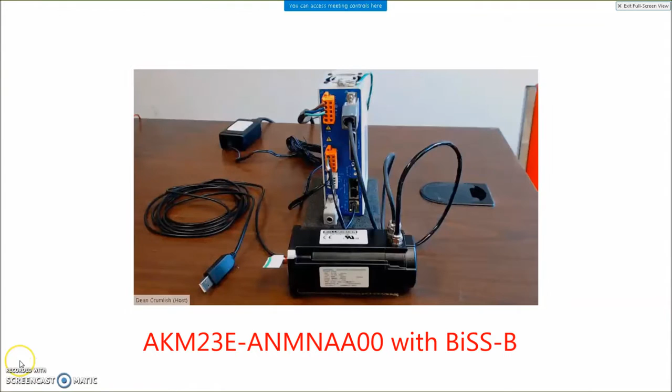So today we're going to look at the Kollmorgen motor with a BiSS-B feedback and a sine cosine. It's very interesting because most of the BiSS applications tend not to have sine cosine. But the sine cosine is good for getting a higher resolution by doing interpolation inside the drive.

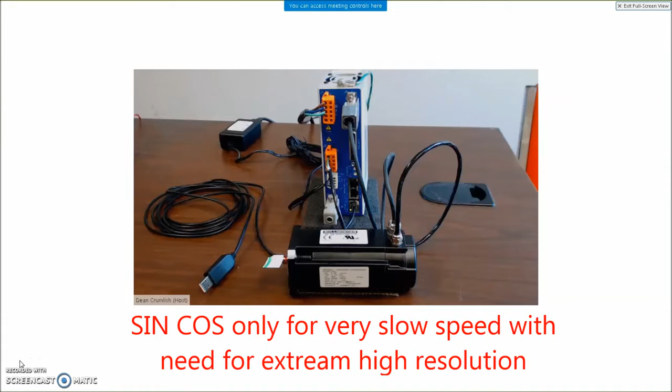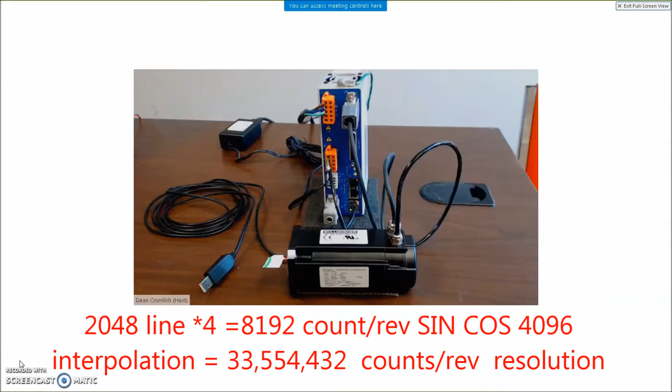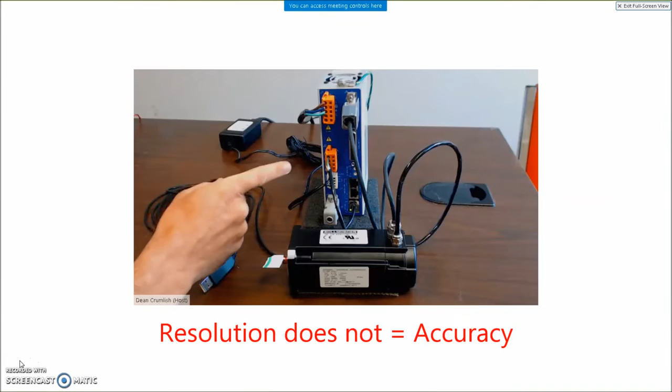I've got the STO bypass jumper installed to bypass the safety. I've got the 24 volts hooked up. There's no brake on this motor, but if there was, we could hook it up here. Got the motor power wired, U, V and W, and I have the AC power, 120 volts AC. This can take 120, 240, 208, whatever your AC is.

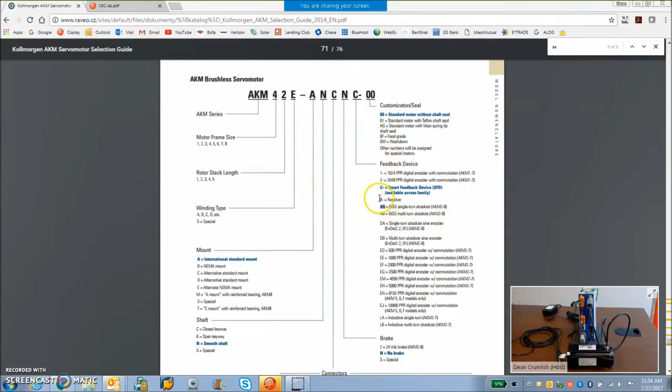So I've got the AKM selection guide here. It's a 2014 document. You can see the AKM, all the different frame sizes and options. This specification sheet contains all the inductance, resistance, torque constants, continuous currents, everything we need for the motor specification data. Plus it details the feedback devices that are options for this motor.

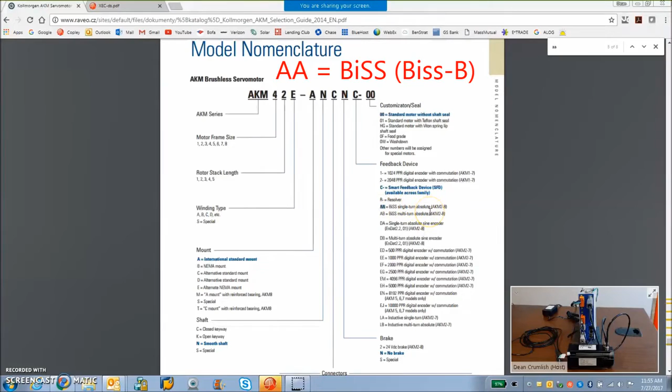And today we've got the AA, which says BiSS-C single turn or BiSS single turn. It's actually a BiSS-B, like a Hengstler device. And it does come with sine cosine. That's very familiar with like an EnDat 2.1 with sine cosine, but with the 2.1 you would need the sine cosine. With the 2.2 EnDat you would not need sine and cosine. And the same is true for the BiSS-B. You don't need the sine and cosine.

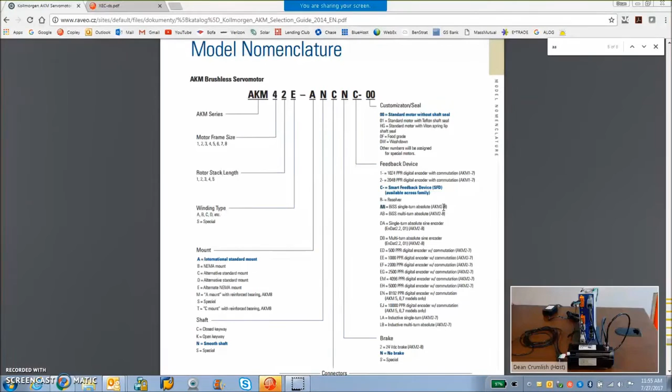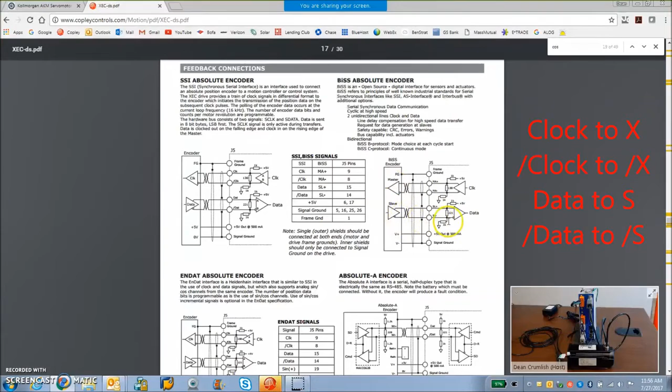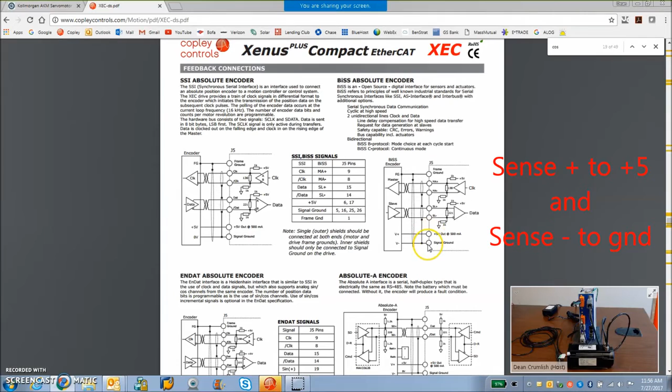So I'm looking at the Xenus compact data sheet here, and it's showing the BiSS absolute encoder and how to wire it to the feedback connector. We have clock coming out of the drive. That comes out on the X and X naught and clocks out the data over the S and S naught. I've got +5 and ground connected. The motor has a sense plus and a sense minus. I'll double those up on the +5 and ground so that I have less IR drop over the cable length.

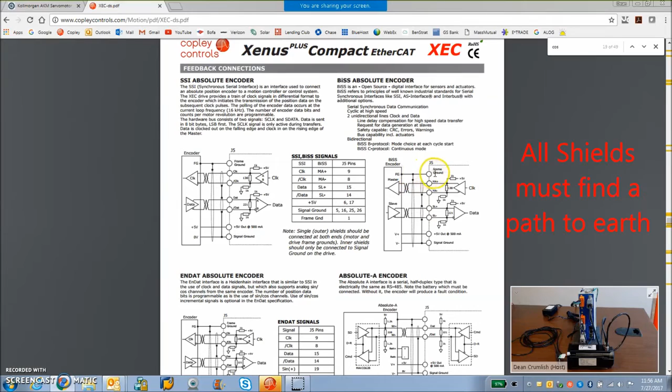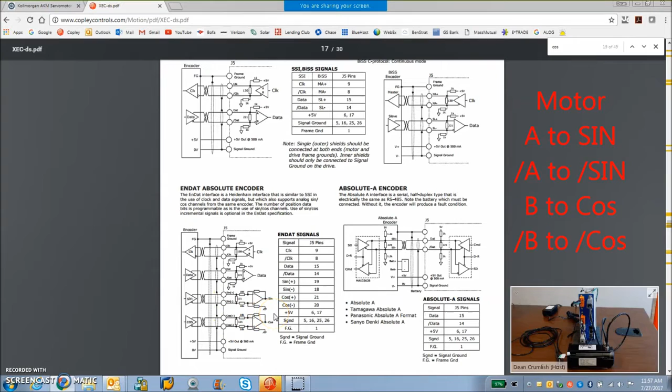And of course, make sure you hook up the shield to earth. The drive, the Copley drive, has pin 1 for the frame, so take the shield and connect that to pin 1. And for the sine cosine connection, we'll do the same thing we did for the EnDat. The shield hooked up, and we have sine plus, sine minus, cosine plus, and cosine minus connected to the drive with respect to the signal ground and the +5.

So I'm using CME2 version 7.1, the latest beta, downloaded and installed, and I've got the drive configured from the motor specification. But I did want to show something about the feedback resolution. You can see we're holding position. Normally we hold position plus or minus a count, but we've got some ridiculous interpolation here to get us the resolution. It's like 33 million counts per rev. And sometimes, what do you get when you get more counts per rev? You get more following error.

You also have more counts per rev for closing loops and stuff, so that's good. But just so you can see, when we're enabled, you get plus or minus maybe 100 counts, and then when we're disabled, there's still noise. I mean, this is an analog signal. It's susceptible to noise, and it's still going to have plus or minus about 100 counts of noise error based on the signal to noise ratio.

And this Xenus Compact has some of the best A to D converters. It's off chip. It's got a high ENOB. So this is just the effect of interpolation, but it's fine. We're getting crazy resolution, and that's working for us really good. We'll show you how to do that too.

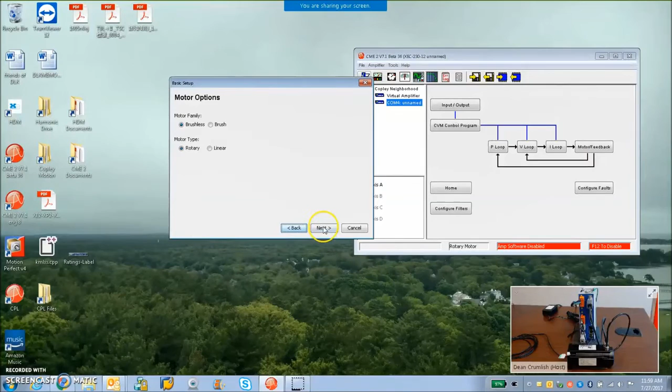So the first thing we look at on the basic setup is how to configure this sine cosine. We're going to say we have BiSS on the motor shaft, and we're going to say the load is the sine cosine. That's the analog feedback, and we'll use that to close the position loop. So technically speaking, the current and velocity loop are based on the motor absolute encoder. This is good for commutation, and it's also a reasonable 500,000 or more count for velocity loop tuning, which is perfect. And then the high resolution will come from interpolating the sine cosine.

We can also put it in the mode of operation we like, and we can emulate the encoder count output. That's from the load. That's the 33 million counts per rev, so we may want to divide that down if there's a controller that's looking at that too. But for the most part, just let the Copley close the position loop and read the position over the serial port or EtherCAT port or even the CAN port on a CAN drive.

So we'll take a quick look at the configuration of the Kollmorgen feedback device. It does say 24 bits in the catalog, but it's really only 19 bits with 5 alignment bits that aren't used for anything. We select BiSS-B and we come up with 524,288 counts per rev. It's a single turn. If it was multi-turn, it would be a 4096. Probably has the Hengstler with a mechanical device and no battery.

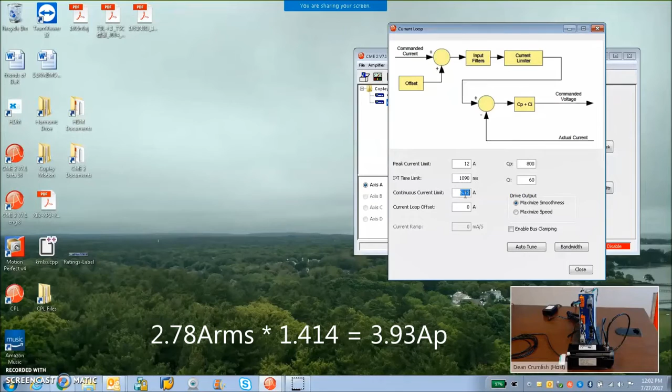The peak and continuous current are calculated. This is the peak of the amps, not the RMS. So, RMS times the square root of 2 gives you the continuous peak. So that's where this number came from. And the 12 just happens to be the 12 amp peak drive limit that I have here. So that's fine. On the V loop, you can see the velocity limit. So this number should always be 10% greater than the maximum speed I want to command.

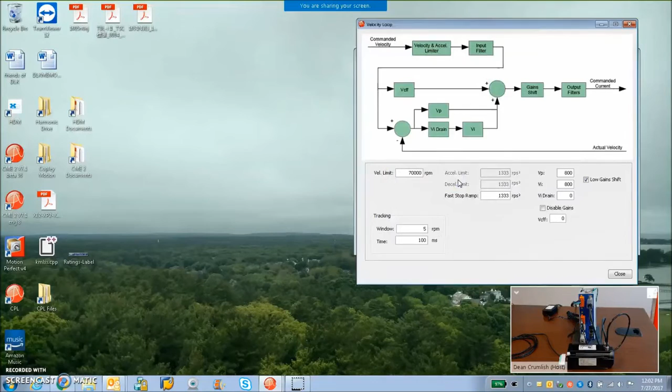There's some limiting going here. And the gain values are initially calculated, but I did some velocity loop tuning here. So we'll take a quick peek at the velocity loop tuning.

So first, the current loop auto setup checkbox, hit start. You can see the current loop step response. Even if I'm hitting it with a large step, I get a well-behaved current loop here, so that's fine. I've got 900 hertz current loop bandwidth.

So next I'm going to apply to the velocity loop, auto setup checkbox, so I can look at the current actual, but I'm going to chop the calculated acceleration down a little bit here. If I had an inertia or a load attached, I'd want to further reduce the acceleration because I don't want to hit a current limit while I'm tuning.

My speed for 400 RPM is slow, but my back and forth rate might be a little high, especially if you have a load attached. So we're just banging it back and forth at a nice, comfortable commanded velocity. This goes through the limiter and becomes a limited velocity. And you can see the step response. There's a little ripple in there due to the motor's cog or detent, but that's okay.

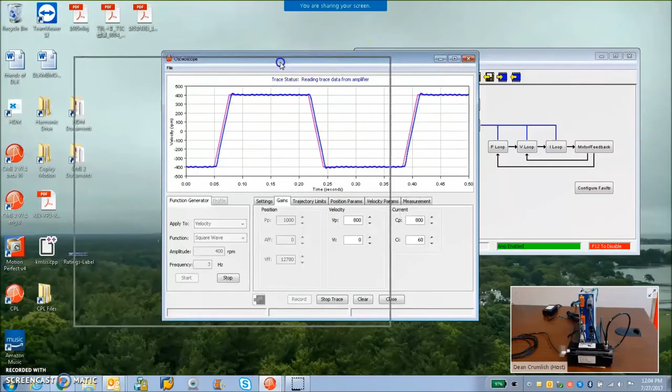But basically what I do is I set the integral to 0 and look at the steady state error, shoot for the P term first. If the P term is too high, you'll break into oscillations, especially if your velocity loop pole is a 2-pole. So I move the pole out by making it a single pole, so the roll off is a little less.

So you can see the oscillations. That was at about 180 hertz, somewhere near where the phase margin shifts as the pole is located there at 200 hertz. But with a higher gain, you get a stiffer velocity loop. I'm going to relax it a little bit so I can move my pole around in case I have a mechanical resonance in the system. It's always good to reduce it.

And then we can start off with a high integral term. Again, we'll look at the integral windup at the end of acceleration to see if we get much overshoot. And it's not much. That might be a little bit high, but we'll turn it down during the position loop tuning.

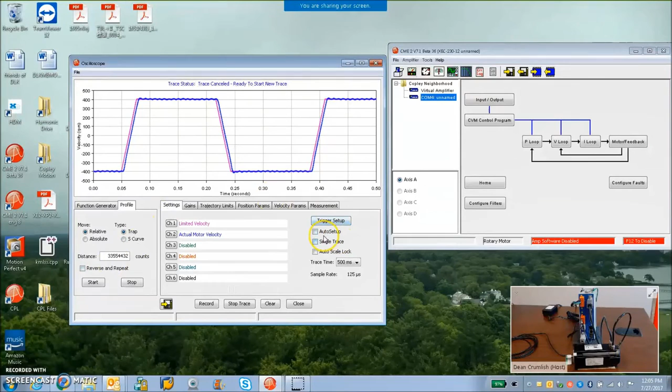So I'm going to put in a value for acceleration here based on my counts per rev. So I have a rather high number, 33554432 counts per rev. Auto setup checkbox again. 33554432. There's 1 rev. I can set the trajectory limits. Let's hit 1,000 RPM. We'll go at 100 RPM here.

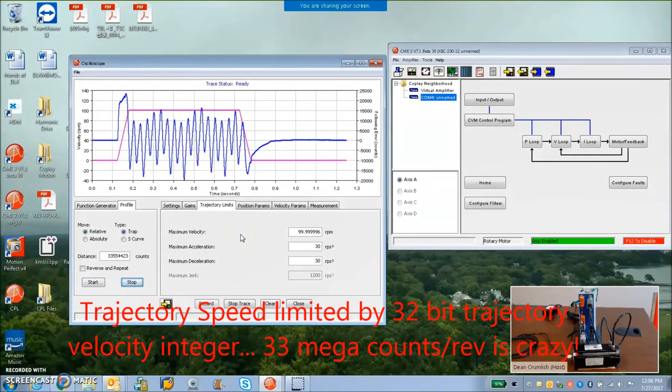So we can see that the tuning at the following error, the integral gives us a little amount to get to the steady state. I can increase the integral gain to get the steady state to settle in a little bit quicker. If I overdo the integral gain, then I could get integral windup.

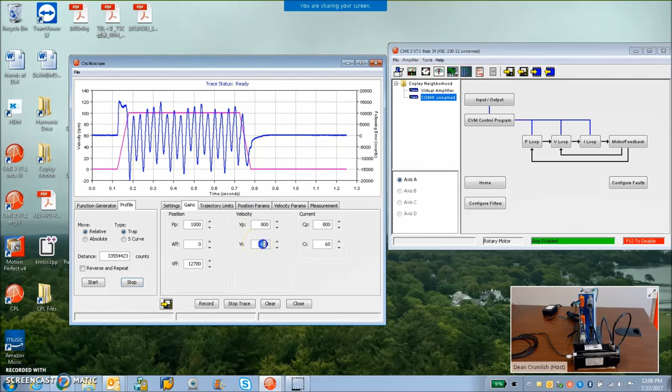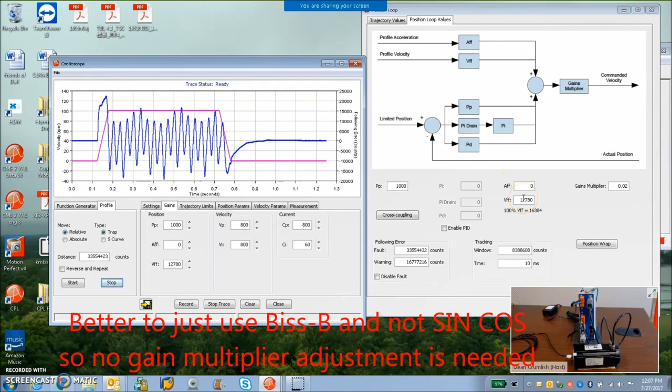So taking a look at the P loop, I can see the gain multiplier was set by the calculations to 0.02. When multiplied by 1,000 Pp, that gives us a nice stiff gain. I had to reduce the feed forward term. The calculated value is actually 0.015, which is not that much resolution here, so I have to decrease the feed forward from 16,384 down to 12,780 to get my following error to be 0 while I'm moving.

One disadvantage of using so many counts per rev are limitations in the velocity calculations. So it's a 32-bit signed integer, so we have to be respectful of that. If we want to go at high speeds, then we'll knock the resolution down on the sine cosine, or just use the BiSS-B as it is installed on the encoder, and don't bother with the sine cosine.

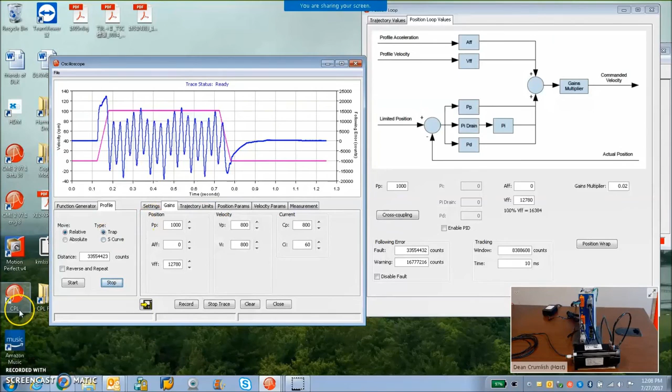So at the end of the day, don't forget to save your settings to flash and save a CCX file with your tuning parameters. I've got this one saved as both BiSS-B and sine cosine, and my recommendation is just to use the BiSS-B without any sine cosine.